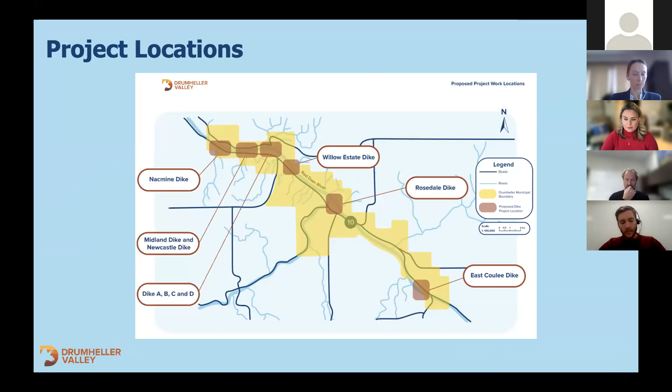Thanks so much, Catherine. We'll flip to the next slide, which gives an overview of the project location. This is a general map showing the areas where we're going to be targeting berm construction in the coming four years. These are all projects we have funding for. Today, we're going to be talking about the Midland Dike, located towards the upstream end of town. But these project areas together add up to about 14.5 kilometers of berms that we're planning to construct in the coming years, and 340,000 cubic meters of fill that we're aiming to place during that time.

So just wanted to reiterate, there have been some questions coming up about the berm design itself. We are going with a 6-meter top width for the berm, and we're designing to the province of Alberta regulatory flow rate of 1,850 cubic meters per second, plus 0.75 meters of freeboard above that.

The basis for that design, as Mark Brotherton has discussed at past meetings, is that it allows us to add additional fill in an emergency event if needed in a hurry. There's typically only a couple of days to respond during a flood emergency once we have the forecast and see flows rising upstream on the Red Deer River. So having this extra space allows vehicles and equipment to safely travel on top of the berm and place additional fill if required in the future.

As well, the 100-year flood we're designing to has seen a 30% increase over the last 25 years. Between 1997 and 2021, that target for the 100-year flood has definitely been moving upwards. So we need a resilient design that is looking to the future and something that's expandable going forward.

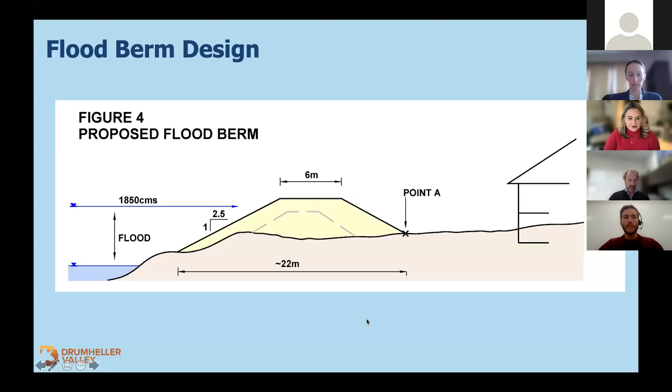In terms of project funding, we currently have a program budget of $55 million. We have funding dedicated from the Government of Canada Disaster Mitigation and Adaptation Fund, and provincial funding from the Government of Alberta Community Resilience Program, which accounts for about 50% of our funding. The Town of Drumheller has dedicated approximately $6.6 million.

We also submitted another application this week through the Disaster Mitigation and Adaptation Fund for additional berms not identified in the original program application back in 2018. That includes the Riverwood Close berm, the Scarlet and 10X dikes in Rosedale, and the Cambria and Lehigh dikes. Those have been added to the program should we get funding, and it might be several months until we hear back, but the Flood Office has flagged it for future construction consideration.

Now we'll go through the schedule where it stands for the program. As mentioned before, it's a big program with more than 14 kilometers of dikes to be constructed, so we're spreading it out over the next several years in manageable chunks.

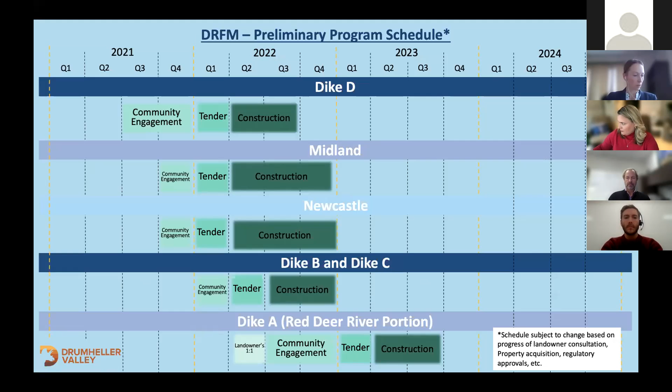Dike A along the Michichi Creek will have landowner discussions into 2023, community engagement to follow, and tender and construction in 2024.

The Willow Estates berm will have community engagement early in the new year, then tender through the spring and construction through the fall of that year.

Nacmine and Rosedale will both have landowner one-on-ones starting in spring of next year, community engagement to follow through the summer, tender towards the beginning of 2023, and construction in spring and summer of 2023.

East Coulee will have landowner one-on-ones toward the middle of 2022, with community engagement to follow in 2023, and construction targeted for 2024.

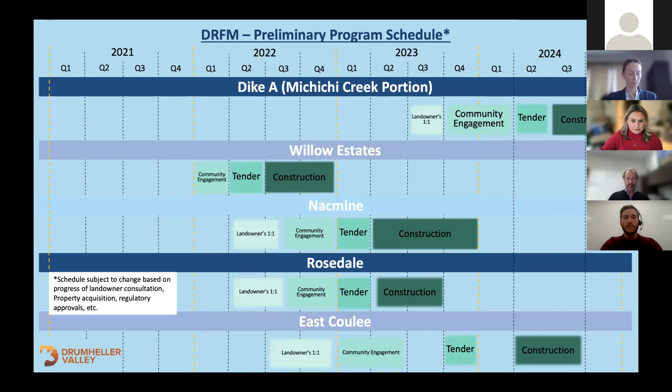Thank you, Dagan. Next, I'm going to be introducing Irv Gerling, our community advisory representative for today. Thank you, Catherine. Good day, everyone. I understand there's been some interest of late with regard to the formation of the Community Advisory Committee, including who are the members of the committee and what they will be doing to assist in this flood mitigation process. I have the pleasure of both introducing the committee members as well as providing information that may answer some of those questions. Can I have the first slide, please?

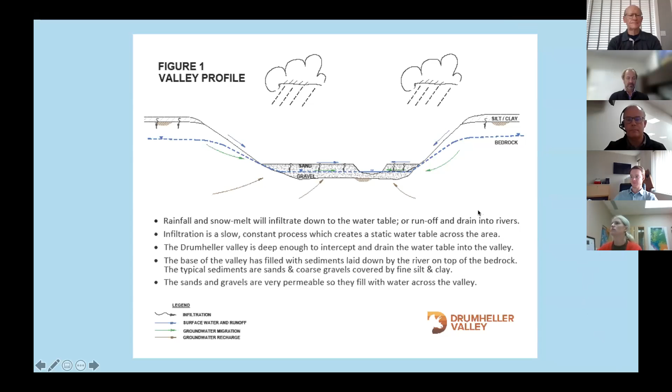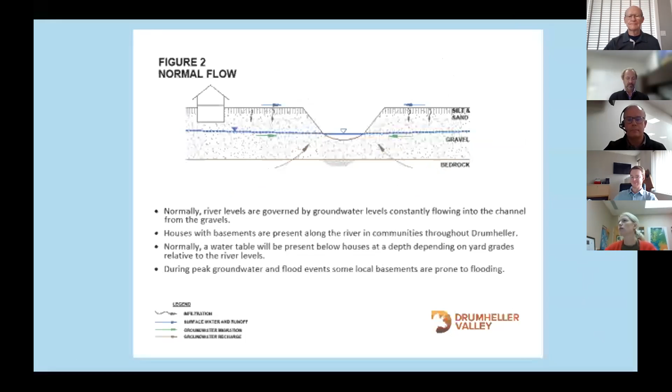If you go to the next slide, I'm going to focus in just on the river channel. You've got water coming up from the bedrock underneath, water infiltrating from snow melt and rainfall down to the water table, and water draining into the valley through runoff and groundwater flowing down because of the slope of the groundwater table in the slopes themselves.

Now, in the Drumheller River Valley, we've got a lot of development in some of the side bars we have along the river. Places like Central Drumheller, Newcastle, and East Coulee all have houses built in there. Some are manufactured houses without basements, but a great number of the communities along the river have houses with basements.

Normally, the water table will be present below these houses at a depth that depends on the yard grades relative to the river levels. The groundwater flows into the river, and normally that water table governs where the river level is. During peak groundwater and flood events, some local developed basements are prone to flooding, and that has nothing to do with the river as much as things like the runoff from your roof, the grading around the yard, and potentially seasonal groundwater fluctuations if they're deep enough.

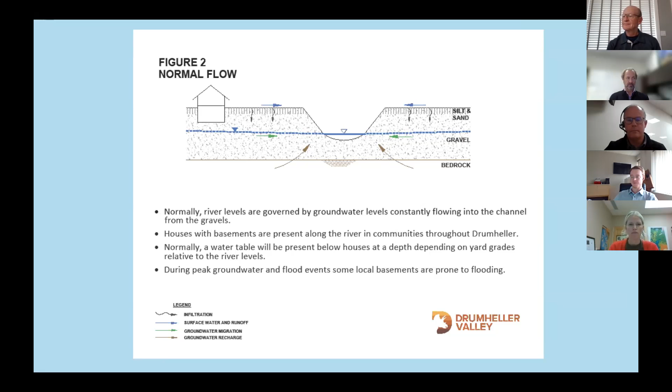And if you have a house close to the dike, the chances of your basement being flooded are going to be determined and governed by a number of different factors. The chances will be determined based on how close the house is to the dike.

What kind of materials are the dikes built on? If the dikes are built on sandy, gravelly materials, there's going to be a lot of movement, and the impacts below the dikes will extend a considerable distance inside the dike. If the materials are clay or bedrock, there won't be much penetration of water underneath the dikes, and the development behind them will be a lot safer. So again, the biggest impacts occur in sand and gravel subgrades.

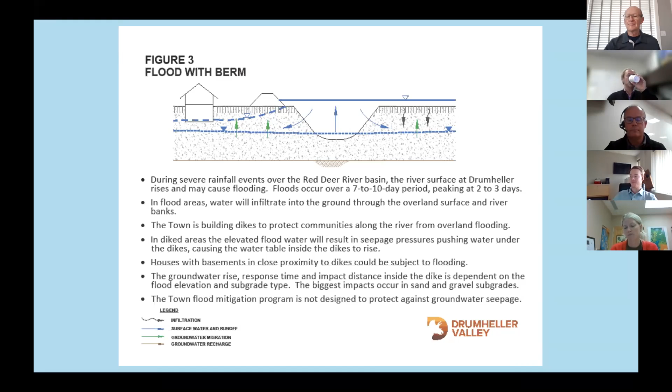We've said this on a number of occasions: the town's flood mitigation program is not designed to protect against this kind of groundwater seepage underneath a dike. There are areas in the town of Drumheller where houses meet all the criteria of having an unfavorable subgrade and a lack of distance between the dikes and their houses, which have a tendency to flood or have a seepage issue during a flood.

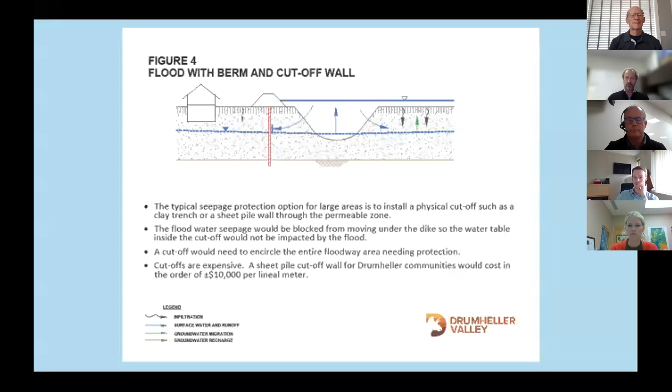Now, it should be understood that cutoffs are expensive. I don't think a clay trench would even be practical here unless it was a very shallow dike or cutoff trench, and even then it's going to be adding costs to the dike system we're trying to build. If we have to go to a sheet pile wall, for Drumheller in most communities, it's going to end up costing somewhere in the range of about $10,000 per lineal meter.

So if you look at that in terms of what a community like Nacmine or Midland would need, you'd probably be looking at about a kilometer of dike. And a kilometer of dike at $10,000 a meter is a huge number. It would take basically a large chunk of the money available to the town just to protect one community. Next figure.

So here's the problem with that kind of a system. We have seasonal high water table issues in all of the communities along the rivers because we have all this water flowing into the river valley, and those gravels in the river valley fill up just like having a bathtub full of gravel. You can fill that water up, and it's just going to keep coming in there. During the spring, especially in the period of higher precipitation in addition to snow melt, the water table in the Drumheller Valley fluctuates. Typical fluctuations in the valley are probably as much as a couple of meters.

But if we put a barrier to stop water from coming in during these occasional 7-day flood periods, we put a cutoff in there to stop that. That cutoff's also going to block the flow of water trying to drain into the river from the gravel deposits in the base of the valley. And the volume of water that we would be blocking is, quite frankly, massive.

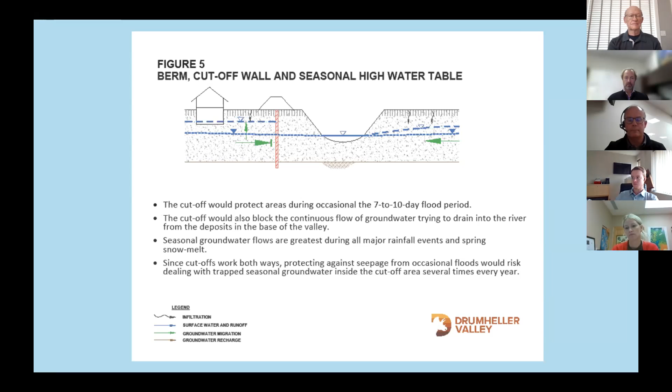The thing we have to understand is that because all of the water flooding into the gravel from the slopes, uplands, and all the creeks and tributaries feeding these gravels, as well as the groundwater that's naturally there all the time, that water backs up across the entire area. So instead of just impacting a couple of basements in unfortunate areas behind the dike from a flood, what we would be doing is impacting just about every deep basement that intercepts the peak groundwater table in every community.

So if you look at it, an expensive system would be required to maintain water levels below the basements in these communities. So the practice in Alberta is that the most cost-effective way to provide basement seepage protection is at each house, using proper grading along with individual weeping tile systems, drainage mats, water stops, and the like, if you need to have a deep basement in an area that might be prone to high groundwater.

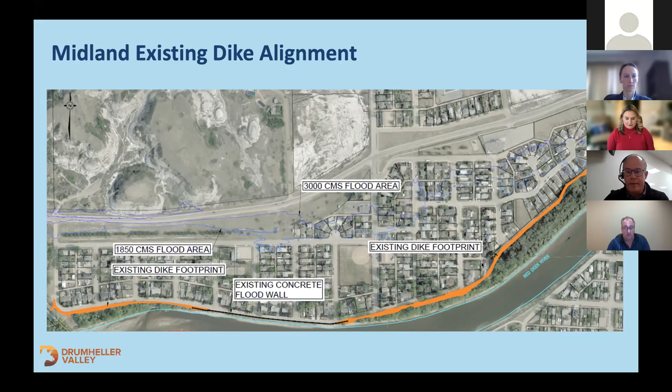This slide shows the existing flood defense system through Midland, with three components: an upstream berm that transitions to a central flood wall, which then transitions to a berm going downstream to protect the downstream properties in Midland. The current project is to extend this dike upstream and raise it. I'll show you where the design is at the moment.

We're in the public engagement process now, and this meeting is part of that. What will happen after public engagement is the final design and preparation of tender documents. Final design will take place in the first quarter of next year, tendering in the second quarter, and construction is currently targeted for the summer and fall of 2022.

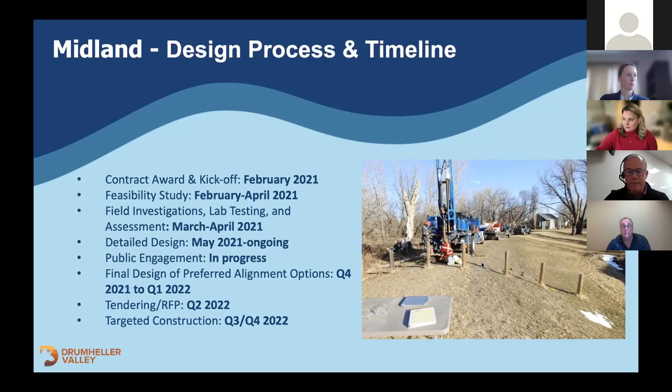Again, we've got three sections of flood defense. We have an upstream dike that starts at North Dinosaur Trail and runs west of 25th Street into the railway embankment before turning east to protect North River Drive. We've located the berm on the upstream end to protect the drainage channel immediately west of 25th Street, and it would go over a culvert that drains that channel and discharges into the Red Deer River. There's a valve at the end of that culvert that prevents backflow upstream. That's how we'd protect the upstream end of Midland.

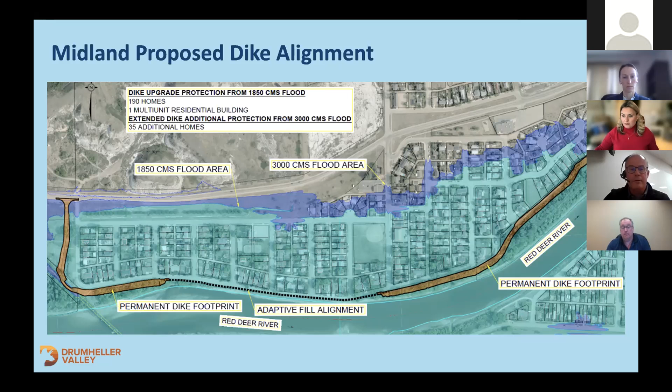We have a dike top width that is 6 meters wide. We've also sloped the top of the dike towards the river so that the majority of the runoff from the dike would flow to the river.

The slope of the dike on the riverside we've put at 2 to 1, but on the land side the slope of the dike is 2.5 to 1.

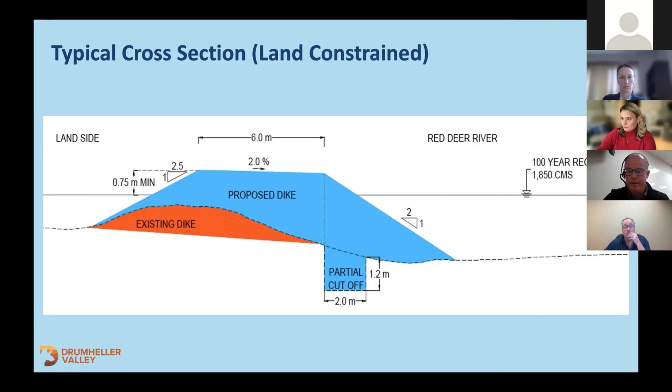Where the existing wall is through Midland, the proposed dike gets quite close to the river's edge, and what we wanted to do is be able to locate the dike as close to the river's edge as we feel comfortable with.

The way we've determined that is by working out where the edge of the Red Deer River channel is, then projecting up at a slope of 2 in the horizontal direction and 1 in the vertical direction. That tells us where the toe of the dike would be at that 2-to-1 slope, and the top of the dike as well.

In some locations, we've wanted to push the dike as close to the river as possible, and that's the criteria we've used to do that.

Typically, the top of the proposed dike is approximately 1.2 to 1.5 meters higher than the top of the existing dike. That's the sort of rule of thumb that can be used to try and work out what the increase in dike height is going to be. I think it's typically about 1.2 meters, but it does vary along the length of the existing dike.

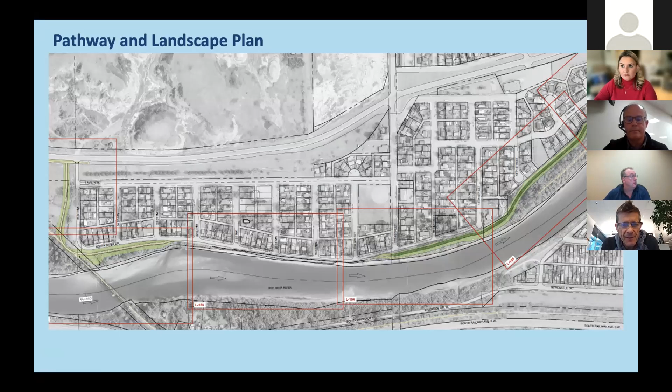If we move to the next slide, we'll talk high level about the trails. The key overriding design principle is firstly to keep the trails as they are. We're mindful there's an existing system, so where we can keep trails aligned as they are currently, or in the same location, that's one of the first goals.

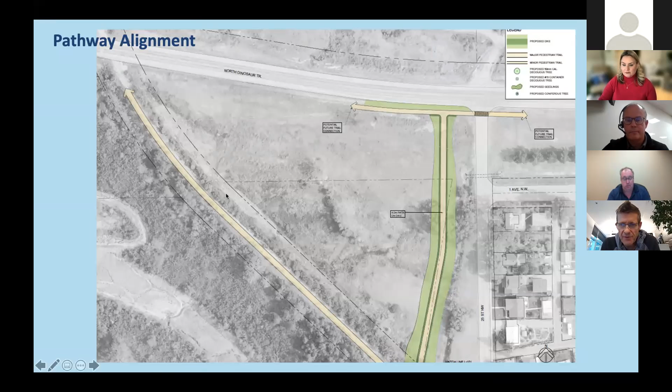Another aspect is to be mindful of future connections relating to the town's MDP and land use bylaw, and the trail system along the river. We're trying to be mindful that the trails in Midland connect to future trails and an overall network.

These plans are still high level, but show where we're proposing schematically to put the trails, which are the tan or buff colored lines on the dike. The dike is typically shown here with the trail on top, the dark green being the shoulder or top of the dike, and the light green being the side slopes and ground disturbed due to the grading of the dike.

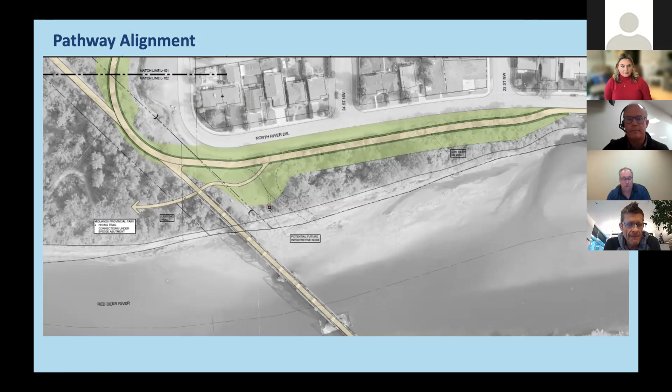As we transition in Midland, particularly to the east, we're trying to be mindful that we don't want trails going along the top of the dike close to people's homes. So where we can, we deviate the path system to the river side of the dike, taking a small gravel trail pathway along the river and away from the ability for people to peer into private property.

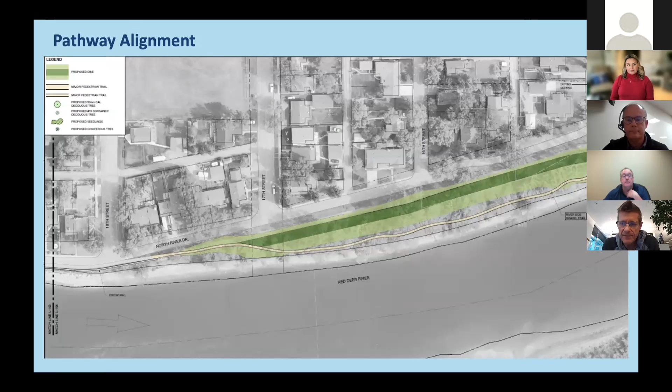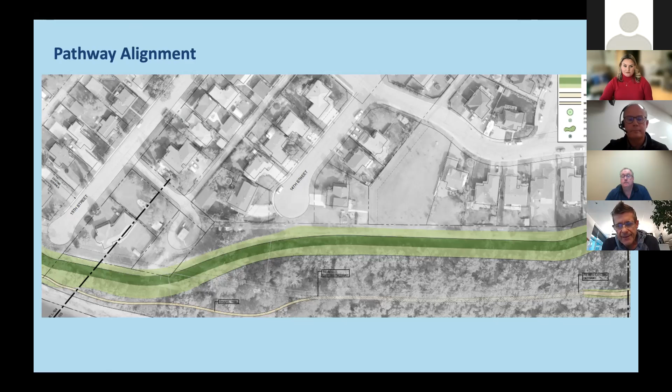Likewise here, there are some existing trails that are well used, and we're trying to tie in any new trails, because of the dike's alignment, to those existing trails, bringing this trail on the east side back into the existing trail network. We're trying to be sensitive to that.

These are still schematic designs, and we're working with the engineers on the grading to and from the dike. It's an important amenity to residents, but it's also important to be respectful of the private property as well, so we're working on that.

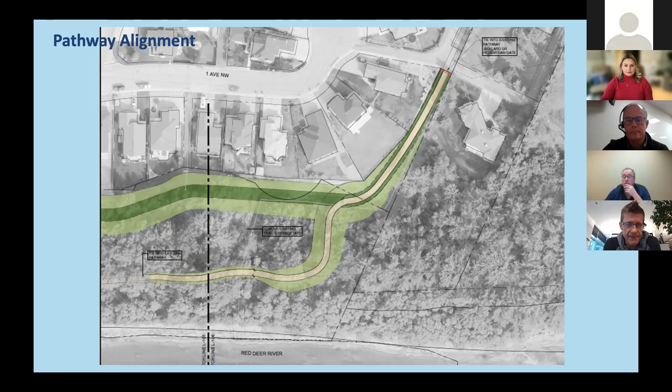Next, the component we're looking at in great detail is the trees. We understand and acknowledge they're an important part of the river valley. Where we're at right now is we're about to start a tree development, or tree strategy, plan.

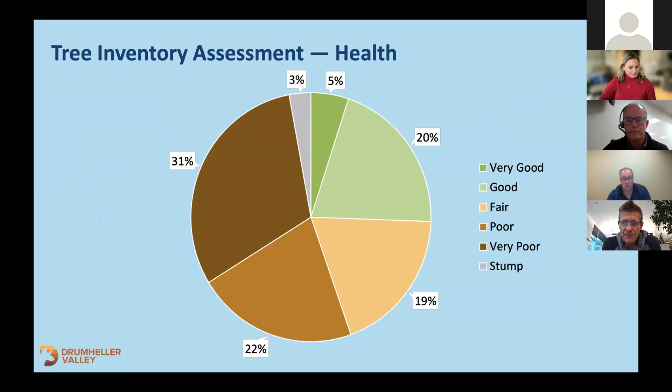We've started to break out species and percentage of the different types of trees, and importantly, the health and condition of each tree. The typical rating for each tree is either very good, good, fair, poor, very poor, or just the stump condition.

So what we've done is take that data from Rangeland and started to input this into the landscape plan so we can get a picture of what we're exactly losing. In some cases it's not bad because some of them are poor, and in other cases they're good.

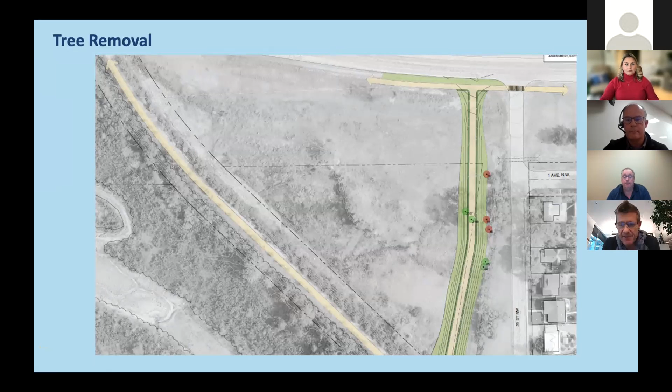The red and orange trees, we're not too bad on that west side, but as we move around the corner onto North River Drive, you can see the trees that are impacted. In the legend, red trees are already very poor, going to green, which are in good condition. So there's quite a wide range, and we have a really good inventory and picture through these plans.

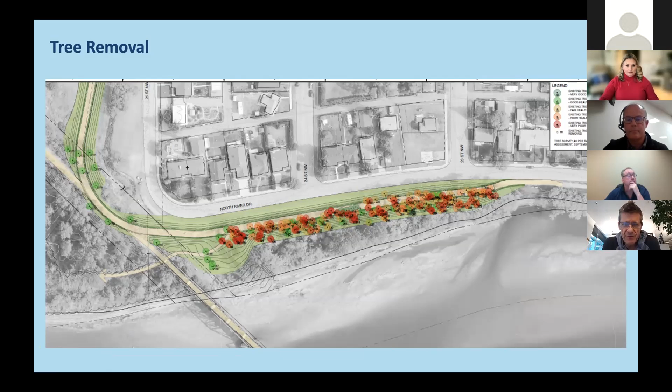This shows what the tree removals are going to look like. Before we can implement a tree strategy, we really have to have a good handle on this and what the impact is.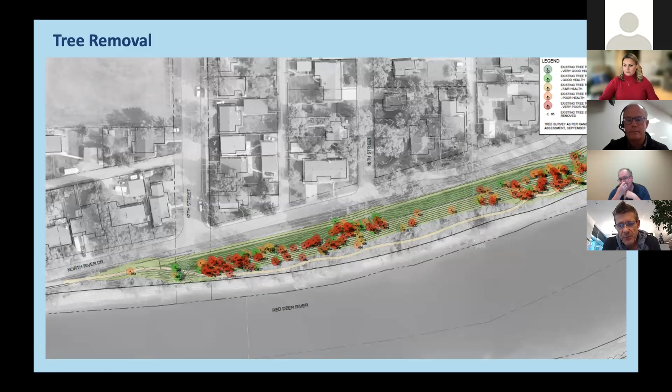And so we're just concluding that part of the assignment. Rangeland have provided the data and they'll be able to speak to real specifics. We are aware of tree removal, the Wildlife Act and bird nesting, making sure the window for removals is adhered to through all the policies in place. Rangeland can speak to that in more detail, but in the big picture, we are doing a really good analysis of what's there.

In terms of what we're going to put back, we're working on that now. We're being mindful of diversity in species when we put new trees back into the area. They cannot be in the exact locations where they come out because the dike is an engineered structure, and we can't go planting trees right into the dike. Otherwise, we compromise the safety and the engineering principles of the design. So we are looking at a strategy that puts new trees back into the same community, but not in the exact locations where they're coming out.

That will be our next step now that we've got this inventory - we'll be looking at opportunities where we can put back new trees. We're also mindful of carbon sequestration and looking into a strategy aligning with that, and diversity of species. There's also opportunities perhaps for the removed lumber to be recycled and reused in the landscape and community. Lots of potential opportunities, but we haven't gone too far with that yet.

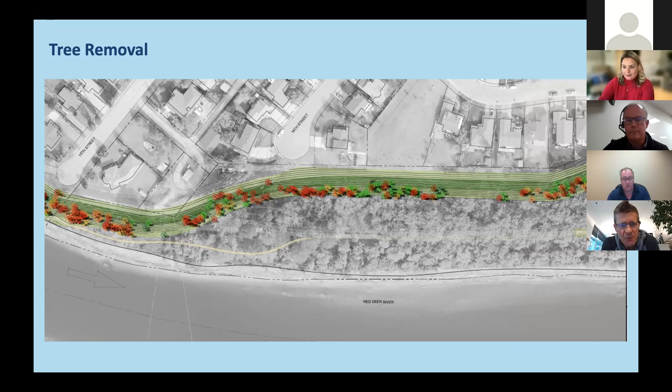This is the status, where we are. I think that was the last slide, maybe one more, which just shows the removals at that east end. And we're just starting to work now through the engagement and with the engineers on the plan ahead for tree replacements. Thank you. Thank you, Ernie.

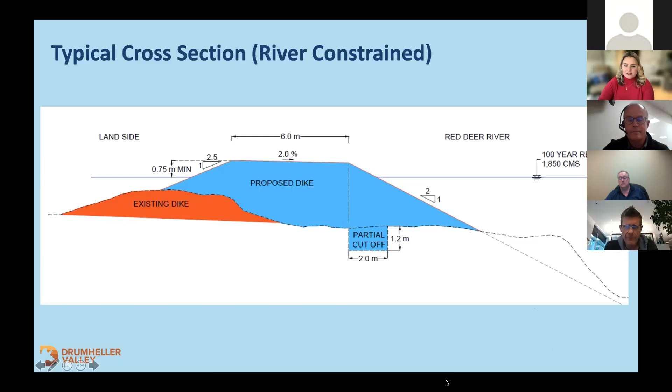Thanks, Robert. Our next question is, what elevation is the existing barrier wall? Robert, would that be for you, or maybe Mark Brotherton? The existing wall is about 1.2 meters high, I'm thinking, maybe a little bit higher, and that would be the approximate height of the wall along there. Maybe it's about 1.2 to 1.5 meters high.

Great, thank you. While we wait for more questions to come in, we'll go to our first online question. Catherine, it's Daryl - sorry, hi, I just wanted to jump in to add a piece to Robert. I think what Elaine's question was, which side was the berm being built on, 25th Street? And I think what that cross section shows is that all along Midland, we're building on the river side of the existing berm. So I just want to confirm, is that correct, Robert?

Sorry, could you say what you were saying again? That the new berm is built between the existing berm and the river and not on top of the roadway. That's right. Yeah, okay. Elaine, does that clarify that for you, or would you like me to just see what side, as I was told by Daryl a bit ago, the proposal was made for the dike to be built on the river side?

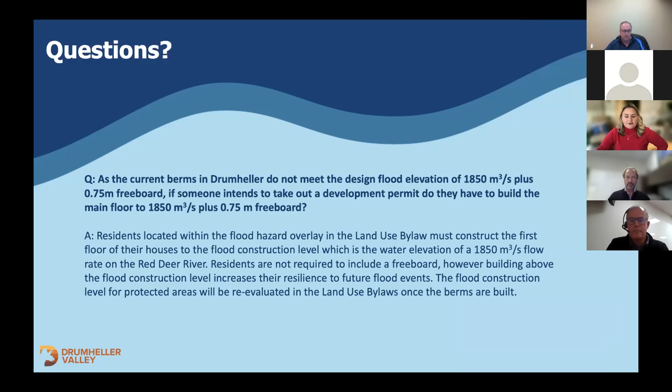Robin, can you advance to slide 49, our next question? So this question came in online again. When the town runs out of dollars building to 1850 cubic meters per second, plus 0.75 meter freeboard, and there are remaining berms yet to construct, how will the town be protected from possible high water events? Would it not make more sense to build to a design flood elevation of 1640 cubic meters per second, plus 0.75 meter freeboard to protect more areas of Drumheller?

Dagan, do you want to answer this one? Sure, yeah. I guess as it states there, we're not expecting that we're going to run out of money for the berms that we've selected to build under the program at present. And it is the provincial government that has told us that the 1850 meters cubed per second is the appropriate design flow, and so that's what we've selected for the program.

If the town were to use a lower flow rate for design, it is likely to impact their eligibility for disaster recovery program funding into the future, and potentially other forms of funding as well. So the town really wants to meet the minimum standards set by the province for the design elevation on our berms in this program. Thanks, Dagan.

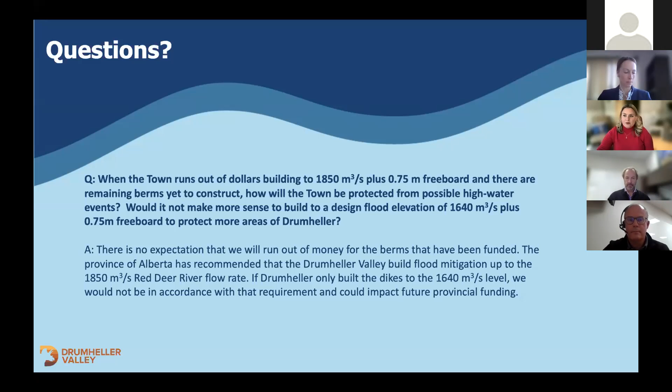Robin, do you want to advance to our next slide, slide 50? Again, this is a question that came in online, and we use the wording as it arrives to us. So the question is, an explanation is required on the protected flood fringe area, and when does the town intend to address this concept in the town's land use bylaw so that realtors and property owners have knowledge of future regulations? Daryl, would you like to answer that one?

Sure. So the protected flood fringe areas are the areas that will be protected by berms that are built to a permanent level, so the 1850 plus freeboard level.

They're currently shown in the land use bylaw on the flood hazard overlay maps. It shows where the future berms are expected to be constructed to the proper level and what's being protected by that. They're not considered protected until we actually have constructed the berms. That's part of our bylaw change earlier this fall, one of the areas that we're considering that people need to include.

They need to also look at the provincial flood maps as well. Once the work has been started, over the next few years the province will be updating the flood maps and we'll be updating our land use bylaws. But of course, we're not in the finished state of any of these yet, so it's premature for us to start doing this work. Really, part of what we're doing with consultation is getting a lot of the people involved along the river informed about the changes that are coming in, and that's part of our information to them. Thank you, Daryl.

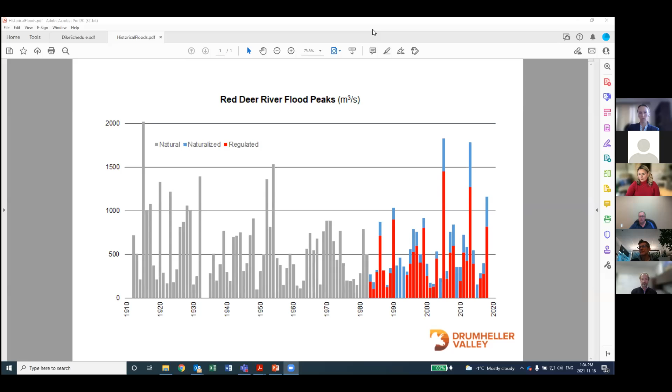Thanks, Dagan. In the interest of transparency, I've copied and pasted that person's comment into the Q&A section so others can see it. We'll go to slide 51, or the next question.

When do you intend to write letters advising those property owners that they are now located in the floodway? Daryl, would you like to answer this one, or Dagan?

Sure, I can take that, Catherine. So I think that for the most part, as it states there, those flood hazard maps were originally, or last major update was in 2007.

Oh, Daryl, you just went on mute all of a sudden there. Is that better? Okay. Yes, sorry. So the provincial flood hazard mapping was published in 2007.

So anyone that has purchased property or moved should have known that. It's actually a right to disclose that if you're a seller or a realtor for that property. So the plan is that there will be no new areas designated as floodway, so we're not going to advise anyone new about floodways that don't already know about it.

I think, again, there's lots of information out there on the flood mapping. One of the pieces that's really important to recognize is that Drumheller isn't the one setting the flood zones, that's provincial. We've been trying to tell people that for quite some time, as we've been told that. So if people are looking for that information, really they should be checking with the provincial flood maps. The link is on the screen for people to look at.

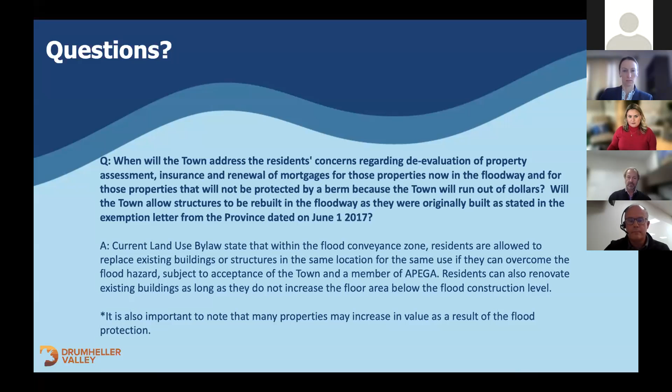Thank you, Daryl. Slide 53.

When will the town address the conflicting information in the municipal development plan regarding building berms to 1640 cubic meters per second plus 0.75 meter freeboard, versus 1850 cubic meters per second plus 0.75 meter freeboard? Daryl, do you want to address this since it's the municipal development plan?

Sure. So as the statement says, I think the original version of the MDP and LUB had 1640, and we've talked about the fact that the province, partway through that process, came down and told us 1850 was the number we would be using. So the final versions of those documents should have 1850 in both the municipal development plan and the land use bylaw. The link is there, and if there's anything that says 1640, that's just a typographical error that needs to be changed. But to my knowledge, it all says 1850.

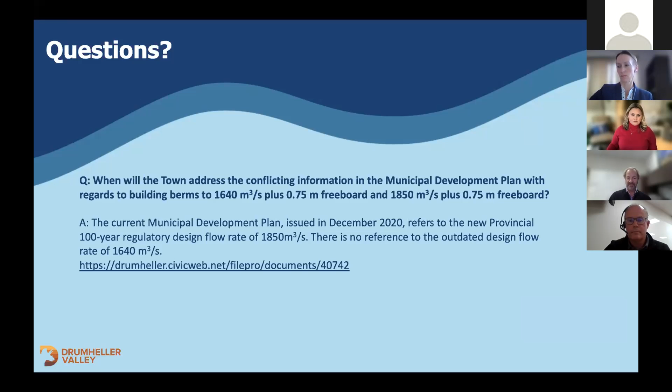Thank you, Daryl. Slide 54. Mark, this one's for you. Where is the berm material coming from if hill dirt is not being used? Is it true the town is using bedrock to construct the berms, as conveyed by the previous flood mitigation officer, Mark Steffler?

Thank you, Karen. The fact is we're in the process of trying to find suitable borrow sites in the valley and above the valley, in close proximity to the town. The use of bedrock material is not really preferred. We're mostly looking at depositional material, colluvium at the bottom of the hills and some of the valleys around the hills, and the glacial and lacustrine materials at the top of the hills that are non-bedrock. As I said, bedrock materials aren't ideal. There are some bedrock materials that can be adequately broken down and used, but the majority of materials in the valley are high plastic and dispersive, which is not conducive to berm construction.

Thanks, Mark. A question has just come in, and this might be for Robert or Mark. For the adaptive barrier on the cement wall, will the amount of fill amount to 0.8 meters?

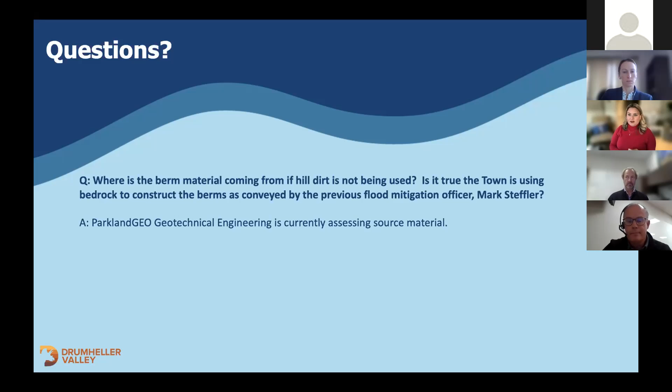Thanks, Robert. Slide 55, please. When the berms are built in various neighborhoods, is it the town's intention to have a drainage ditch between the properties and berms, so there's a system in place for heavy rains and protection of the houses?

Dagan, would you like to answer this one? Yeah, for sure. As our teams move through the detailed design phase, drainage is an important consideration. The berm designs will definitely include provisions for overland conveyance of drainage, whether it's a ditch or other structure at the inside toe of the berms or dikes. In some areas they may not be required, but in most areas they will be, and that will be included within the design.

Mark, another question has come in asking you to clarify the preferred material again. Does that mean the preferred material is clay, or is it gravel, sand, or riprap? The preferred material would be clay, or sand with a high percentage of clay in it.

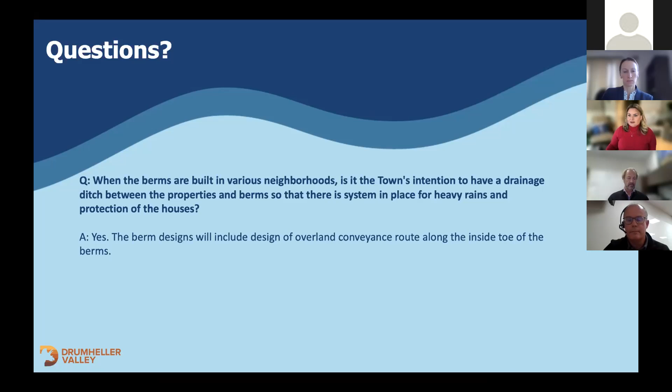Great, thank you. Slide 56, please. When the berms are being constructed and heavy compaction is carried out, who will be covering damages to house foundations and cracked wallboard that may occur? Dagan, would you like this one?

Yeah, sure. I can comment generally that we're including information in the contract documents requiring contractors to undertake the work in a manner that mitigates impacts to any buildings or homes adjacent to where the work is occurring. I'll turn it over to Mark Brotherton, who can provide specifics on items the town or contractor may undertake to help mitigate these issues.

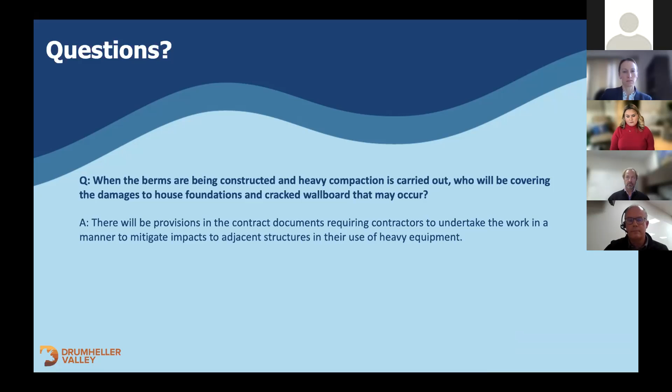This is a common problem in municipalities across Western Canada where we're doing upgrading work beside existing residences. There's a fairly defined practice of doing vibration monitoring as part of a contract. We either have the contractor undertake that work, or we have an allowance for the town to provide vibration monitoring when working close to houses. It's preventative as well as documentary. If vibrations are too heavy, we know they have potential to cause damage, and we can ask the contractor to modify his work program to get below normal thresholds. We'd also look at documentation for houses near construction areas, to record prior and post-construction conditions as a way to mitigate potential disputes.

There's a follow-up question: who's covering any damage that does occur? Typically, if damage is done, it's determined whether the contractor was at fault, or if the contractor was following his contract, then usually the municipality steps forward. But it has to be proven that the damage is due to construction, which is why pre and post condition surveys are important. It's not uncommon for the town to get hit with claims for things that probably didn't relate to the construction, but it's an opportunity for a person with damage to try to get somebody else to pay for it. So we need to be fair, and a program has to be set up for pre and post condition surveys along with vibration monitoring during construction.

We got a follow-up question: is it standard to survey every potential home that may be impacted, pre and post? To be honest, my recommendation would be yes. I know several communities do this on a regular basis. Regional Municipality of Wood Buffalo is one that springs to mind, probably the leader in Alberta for doing this. It's a very effective mechanism for having this issue dealt with between the municipality and residents.

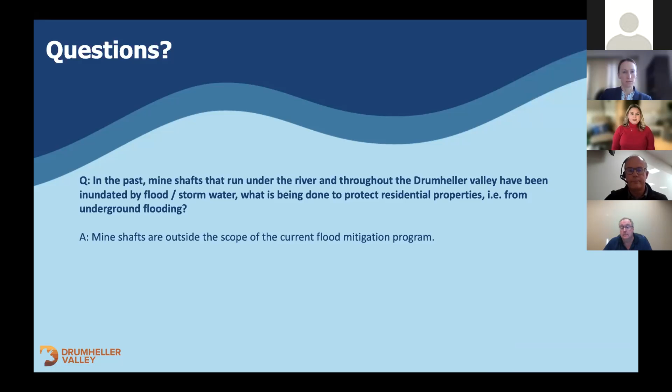Are you proposing to abandon one of the Newcastle ball diamonds for construction of a berm in this area? No, we're not planning to abandon any of the Newcastle ball diamonds for berm construction.

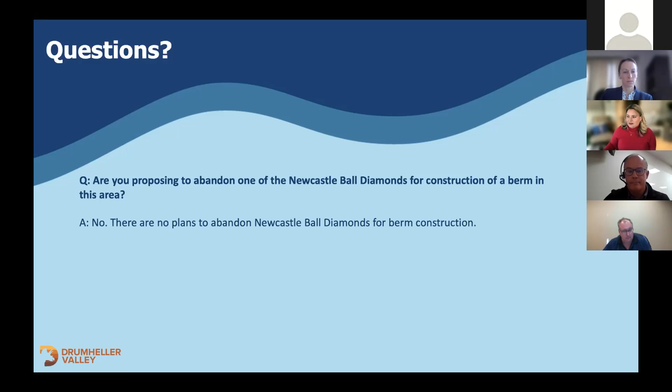Why did the town purchase flood properties when they're now being rented out? The recent property buyouts were for properties where the property owner had approached the flood office regarding a sale, and we took advantage of that opportunity when offered. We have a big program with a lot of landowners to work with over the next few years, so we need to spread things out, not purchasing all the properties one month before construction. We're renting out some properties to offset monthly maintenance costs, and the buildings are planned for removal in spring 2022. So those are just short-term rentals to help cover some of the costs.

What measures are in place for protection of the green belt, in particular the natural native poplar trees?

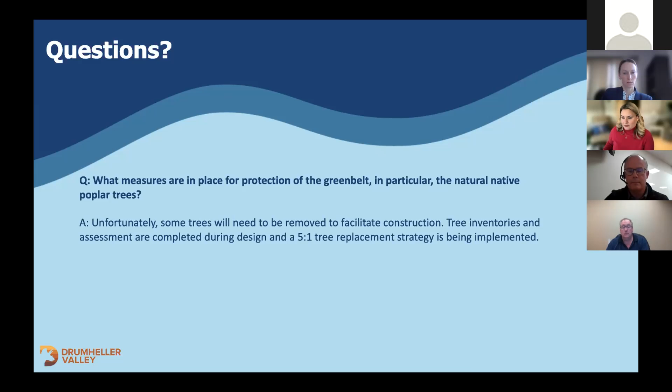As I mentioned earlier, the tree strategy plan is now in progress, and we're looking at ways to protect trees where we can. But as you've seen from the diagrams, it's going to be hard to achieve complete protection, maybe for some significant trees around the edges of the dike. Generally the idea is to have a future strategy which will include a 5-to-1 ratio of tree replacements, including native species and species that are local and indigenous and relevant to the Red Deer River Valley. That's a work in progress, but we're aware we're going to protect where we can.

It has most recently been stated that the tendering process for berms will commence in January 2022. Will this time frame inflate the prices for potential bidding, as there could potentially be 2 to 3 feet of snow on the ground? How will contractors view the job in its natural state?

Dagan addressed this: it's quite common to tender work over the winter months, which allows contractors time to plan their work and get ready to mobilize for spring. So downtown Dike D is going to be tendered in the winter months, but as mentioned earlier, the Newcastle and Midland dikes will be tendered in spring. Contractors will be out looking at the site, ideally not in a snow-covered condition, for those ones. Contractors are really experienced with this, so it's not an issue, and we don't expect that it would change the bid prices at all.

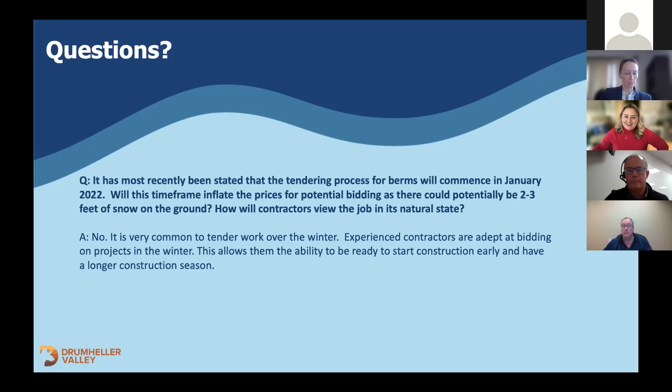The next question, which we've already addressed with Irv: who are the members of the Flood Mitigation Community Advisory Committee, and what have they accomplished to date? Let's slide back to show the names of our advisory committee, on slide 14.

Catherine, I could just mention that we started about the middle of October. We've had around 7 sessions of training, somewhere in the vicinity of 11 hours when you look at the preparation and time spent there. Additionally, depending upon the committee member, we've probably put in anywhere from 6 to 12 hours of group work and background study and review. So it's been a considerable amount of time already, but we're enjoying it.